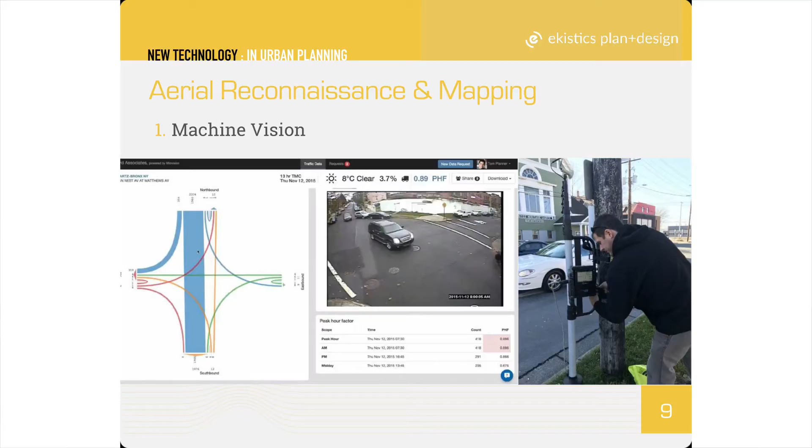The other piece of the machine learning is this Miovision setup—this is Roger in our office. We set these up on street corners, and it looks at the traffic at the street corner full-on, creates video, does it over time. Once you're done, you take that video and upload it to the Miovision website.

You go on to a Google Earth that's built right into it, and you tell it what intersection that is, how many lanes, whether left turn, right turn, straight through, and it generates all of the traffic data for that intersection. The cool part is it distinguishes between cars, trucks, bicycles, and people, doing counts for everything, so if you're looking at a downtown pedestrian count, you can use these machine learning algorithms and tools.

Rob, how do you deal with or manage security of that bit of equipment? There's straps built onto here, and it's chained there. If somebody wanted to come and hack that thing off with a hacksaw, they could do it, but they would be on camera as well.

When we were doing Argyle Street, we put that up to do some traffic counts. You get the data back - 2 a.m. brawls, fights, people come over and jiggle the thing. But nobody's stolen it yet. So, a little bit of entertainment there.

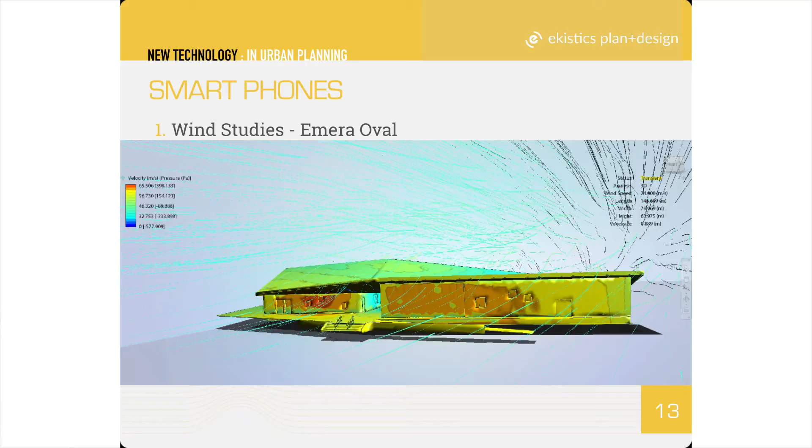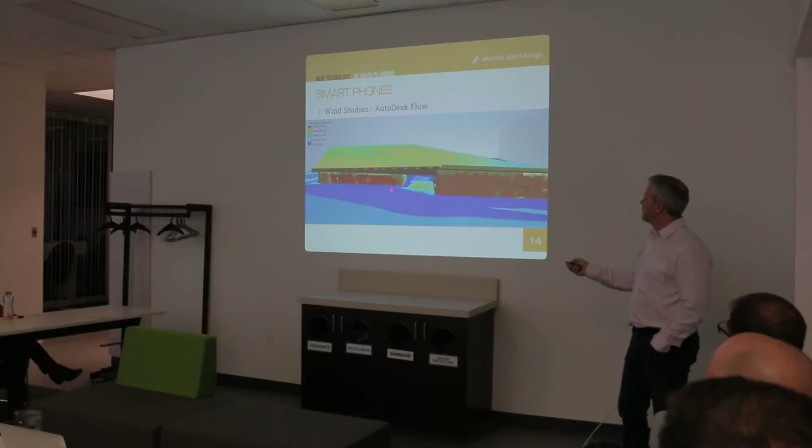This is Autodesk Flow, and this is the Commons building. There were some problems with wind around that building after it was built, so we pulled it into Flow and ran some simulations. You can see low pressure and high pressure areas of the building, and we can do slices through it. They were having a problem with wind blowing through the space between the buildings. In Flow, red indicates the higher wind speeds, blue is the lower wind speeds. You can see how when the wind comes from a certain direction, it really focuses into an area there.

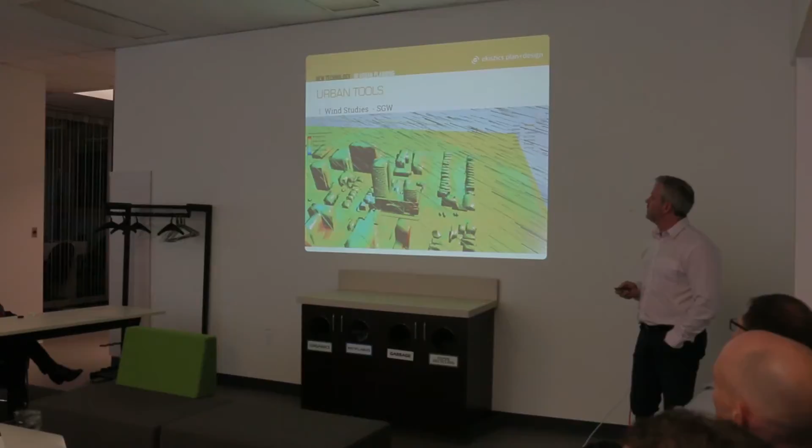Now, this isn't a replacement yet for full-on flume studies, but it does help create a little more accuracy with regard to desktop studies. When you take this, you calibrate it with your anemometer to get the actual wind speeds. This gives you a great relative tool, but not an absolute value tool. With an anemometer, you get much closer to actual wind speeds, and you can do that on a larger scale as well.

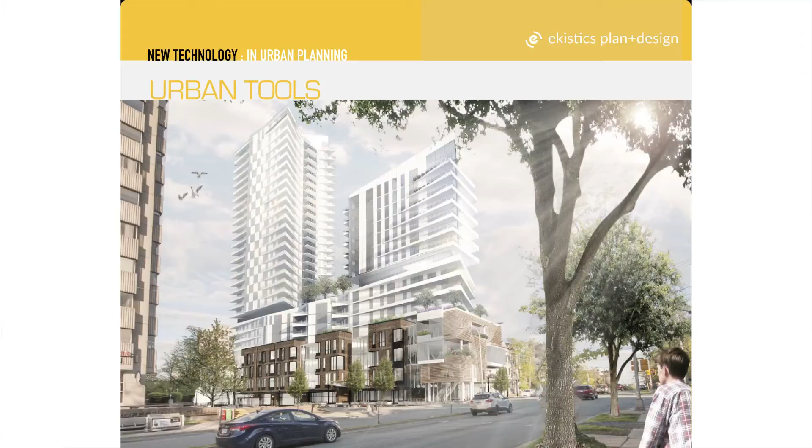It does have some problems - you have to upload this online, and then it generates the simulations. You have to have a really fast computer to run these simulations. This is for Spring Garden West, and we're looking at the impacts between the two buildings and around, actually playing with different forms of the building to see if it would reduce wind in and around the blocks around it.

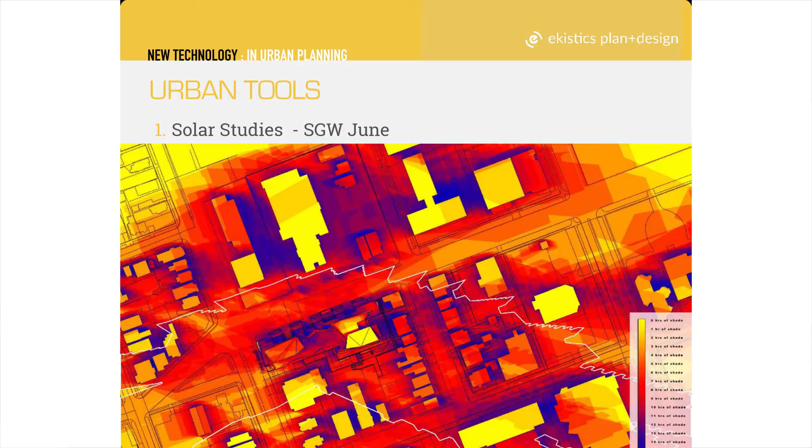Once you've got this information into, say, SketchUp, you can also run solar studies quite easily. You position your building in real space in SketchUp, then run the simulation for winter, summer, solstice, and equinox seasons. You can see the sun come up in the east in the morning, and you get these long shadows, with white lines representing where the building shadow will hit at various hours of the day.

If you pull all these images together in Photoshop, you overlay them one over the other. In the middle of summer, you've got about 14 hours of sunlight, so you set the transparency of each layer at 100 divided by 14, so that when you add them all up, you get black in areas of complete darkness. Then you apply a filter in Photoshop and get these blue areas, which are in shade 14 hours of the day, whereas the yellow areas get full-on sunlight. It's really quite an easy process.

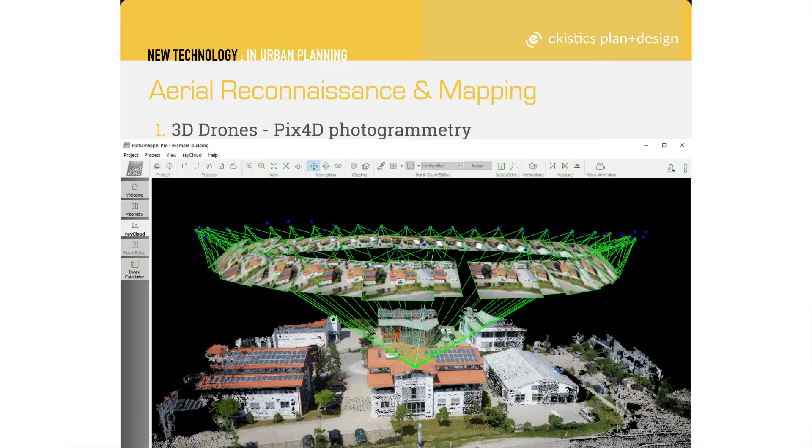The other application here is Pix4D photogrammetry. What it's doing is taking a drone, sending it on a pre-programmed flight of either an object or a landscape, and it creates a full base map from that, almost in real time. The drone flies out on a mission, you upload it, and it creates a base map. But it also uses photogrammetry, taking pictures from different angles to create a full 3D model.

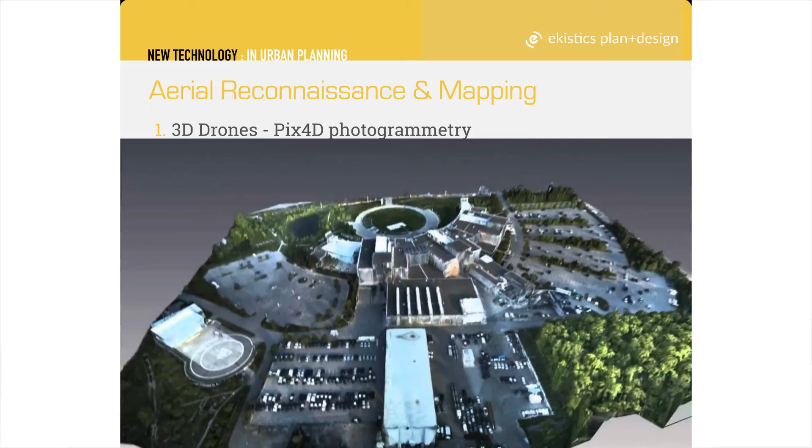It's not as accurate as the new ground-based LiDAR stuff, but it's relatively cheap - about $80 a month for the subscription - and you're able to generate 3D models with this software. It can be used for interesting applications: you can measure distances, the height of trees, topography, and generate TIN models and contour maps from this technology.

It gives you something you can use as a designer. You're able to pull this into, say, Civil 3D and generate topographic maps, do cut and fill analysis, river and floodplain mapping, all that sort of stuff, all with just a simple $1,700 drone.

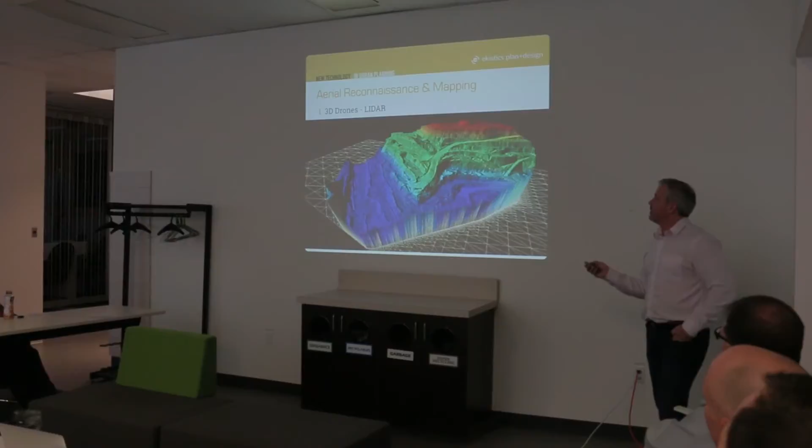The next evolution is drone-based LiDAR. HRM's got great LiDAR for most of the municipality - it was flown at great expense a number of years ago - but the technology to put LiDAR into drones is out now, just a bit expensive. They're anywhere from $20,000 to $30,000 for these new LiDAR-based drones. But in the next 2 to 3 years, you'll be able to pick up a drone for a couple of grand that can actually scan the land, giving us great information and great design tools.

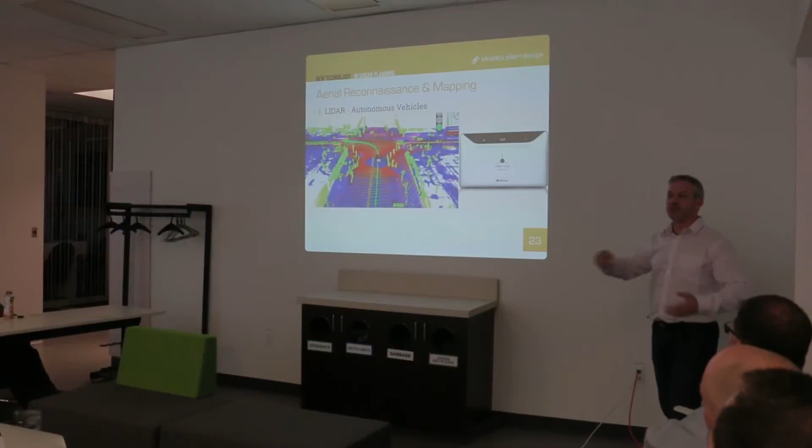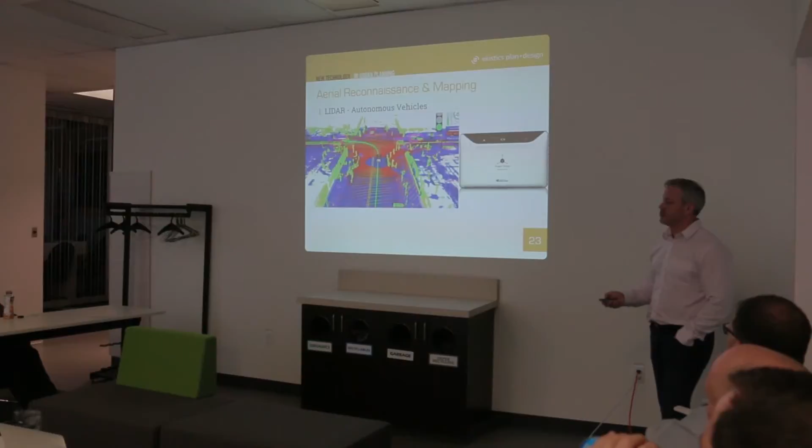LiDAR is being used for all kinds of things - it's really the brain behind most of the autonomous vehicle movement. But Google and Apple are both working on applications that will fit in your next cell phone. Google's working on Project Tango, and Lenovo has just come out with the very first smartphone with LiDAR built into it. I could literally scan this room, scan all you people, take that into software, measure distances, do volume calculations very easily. There are rumors that the next iPhone 8 coming out in September will have this technology built in as well. It starts to get really interesting for planning applications.

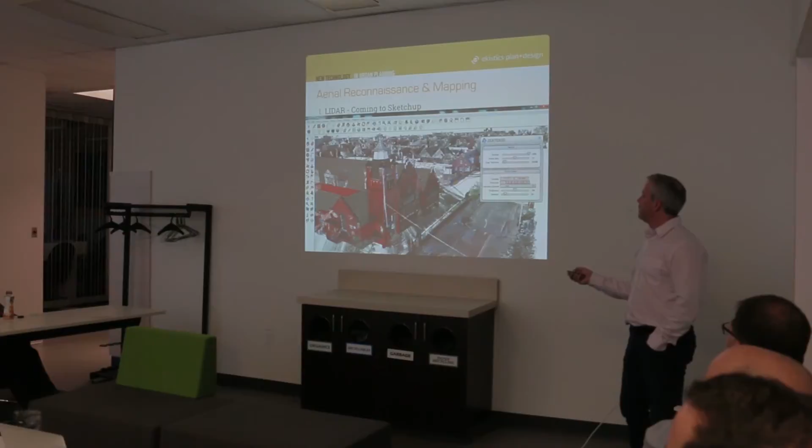Once you've got LiDAR, SketchUp is working on being able to import LiDAR cloud meshes directly into SketchUp, so that you're able to create - it takes about 1 million points out - and just creates simple surfaces from the data set.

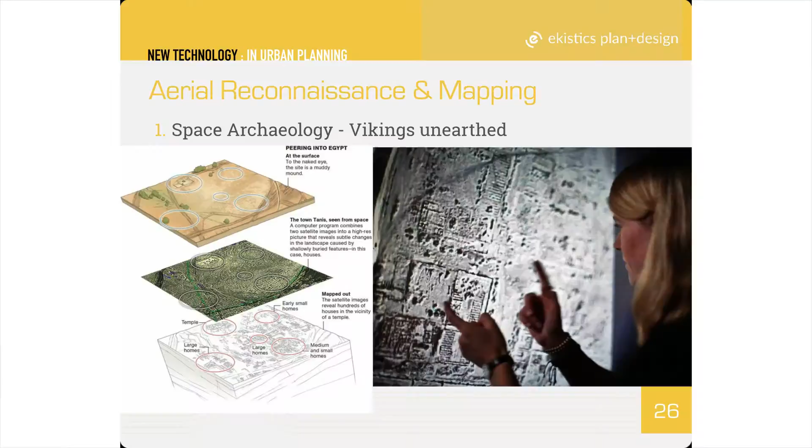One of the other really interesting applications is the new satellite technology. If any of you have seen the recent NOVA program - I think it's called Vikings Unearthed - there's a whole new field called space archaeology, where they're using satellite systems to do archaeology on the ground. The technology can see through about 1 meter of ground, so they can pick up surfaces from space. They've been able to find ancient Mayan sites and other things in the Middle East they didn't know were there. You can see right through the ground and pick up features you don't see with traditional methods.

So this technology is being used to look for new Viking sites all along the east coast here. The NOVA program goes into some detail about the L'Anse aux Meadows site that was found in the late 60s. One of the interesting things they found at the site was a butternut, and those don't exist in Europe. The only place they exist is along the coast of New Brunswick, in Ontario, and some of the southern parts of Nova Scotia.

So when they found that, they surmised that the Vikings must have come down the coast a little bit further, and all of the writings suggest that they came into Vinland. They haven't been able to find it until recently.

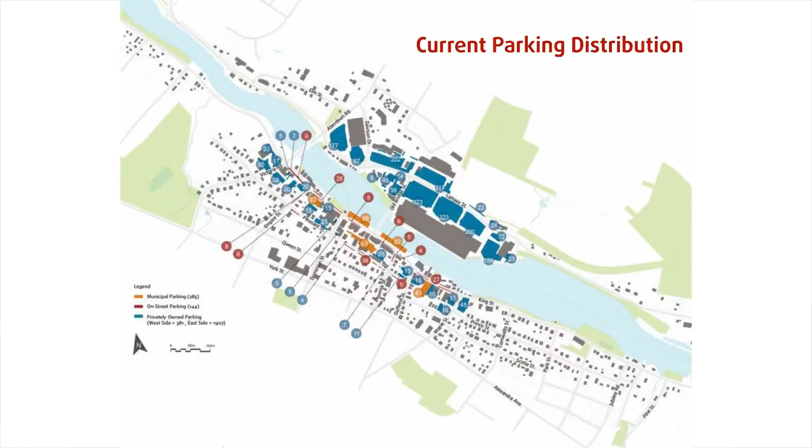This is Bridgewater. We worked on a plan for Bridgewater back in 2012, a community master plan. One of the things we noticed when we started - I'm sure most of you recognize this when working on downtown plans - the retailers quite often say, if we only had more parking, that would solve all our problems. And of course in smaller communities like Bridgewater, that exists in spades - Summerside, Bridgewater - they were looking for more parking downtown as a solution to the urban design problem.

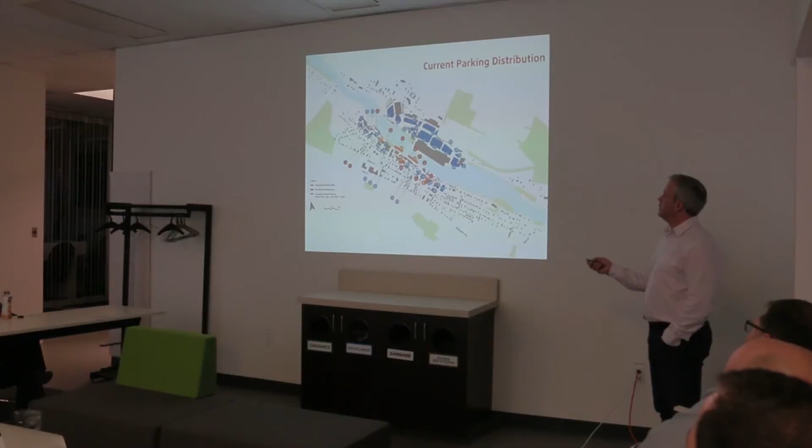But what we were able to do, using some of the drones, was do the parking counts, do the turnover analysis, and suggest some areas where we could fit in a little bit more parking.

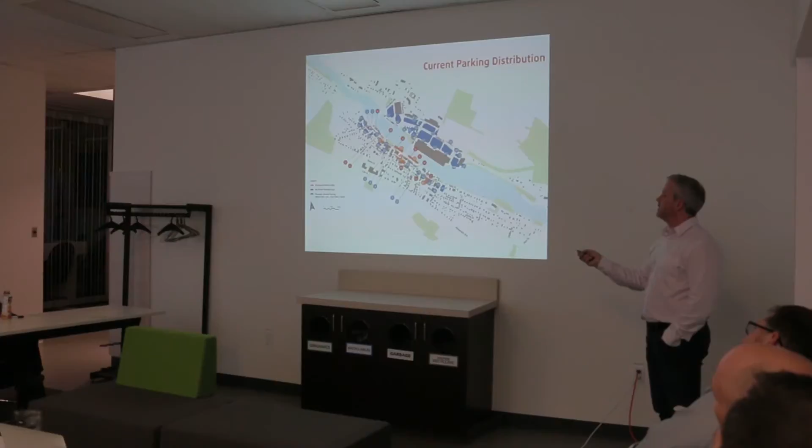But one of the big ideas out of the plan was that there's a movement towards getting a lot more people living downtown - so it's not just Halifax, the smaller areas are looking at that as a vehicle to reinvigorate their downtowns. So one of the things we needed, if we're going to get more people living downtown, was better parks and better connections to the open space.

When you're on the main street, you don't even see the river here because of these two parking garages that they built out over the river. So here's one of these parking garages. Here's King Street, and the river is just hanging down here.

And so one of the ideas out of the plan was, what if we took and got rid of this parking structure and reconnected the main street back to the riverfront, creating a new park.

And so we started to - let me just see if that... I had a little... no, it's not going to work.

We used an animation to be able to design this and fly through this proposed new environment.

This was last week - they opened up the street after 5 months of construction. They've got this - they wanted to be able to drive down, pull boats in and out of the water, new docking facilities, kind of a throwback to the old parking garage that was there, a new lookoff, interpretive panels, glass structures, little seating nodes, landscaped area. So an area where events can happen on the river.

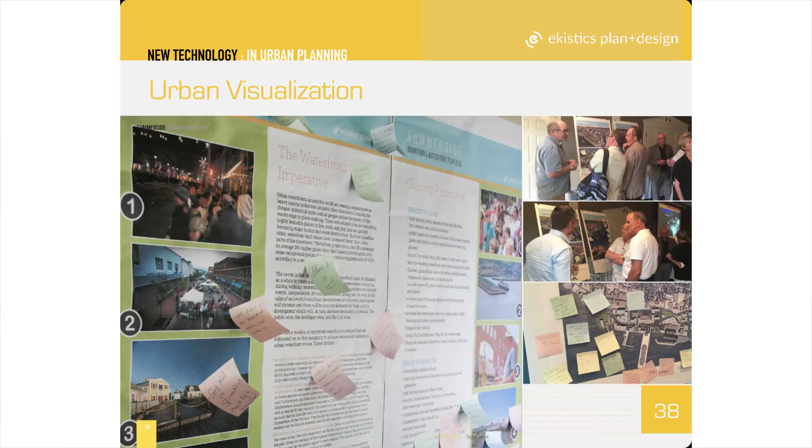But even on smaller communities, we use the same kind of technology. We've run in Summerside almost 3 years worth of public engagement sessions, workshops, community sessions, and open houses to try and get a sense of what the community would like to see.

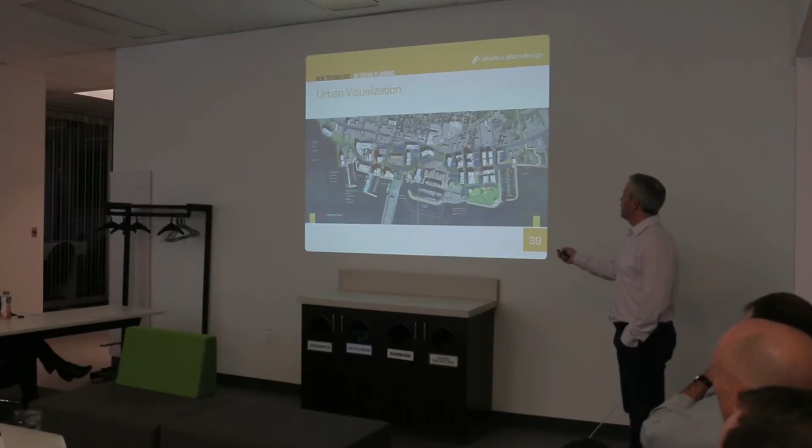It led to an overall plan for the downtown, and if you know Summerside, the old Towers Mall is right here, and so it's in the plan. Part of the big idea is over time to convert that into a campus. It was bought by Holland College, and so the idea is reintroducing a street grid and a new urban structure, creating a new marina, using the infill from that marina to create a new urban park that would service residents as well as the university.

And then if you've ever driven downtown Summerside, it's a lot of open parking lots. So how do we start to look at infilling those sites with new development?

And as well, then you're into the same tools here in Summerside, where we're able to use GIS information to just propagate flat buildings. We went into the downtown, did a little bit more detailed modeling to get some of the existing buildings, and then used buildings to show how this new urban campus might look.

Student housing - it's obviously a very ambitious plan, this is probably a 50-year future here, but for the downtown it's looking at kind of 7 to 9 story buildings, mid-rise buildings, and preserving open space, all these views out to the water. So a lot of the same things that are part of the plan here have been integrated at a smaller scale into Summerside's plan.

Lumion was used for this. Once it's done, you can pop it into VR and look through these landscapes, zoom in and get a detailed sense of what streetscapes look like, what the spacing of buildings might look like, how different scaled buildings feel on the street, and that helps inform your form-based code for the area.

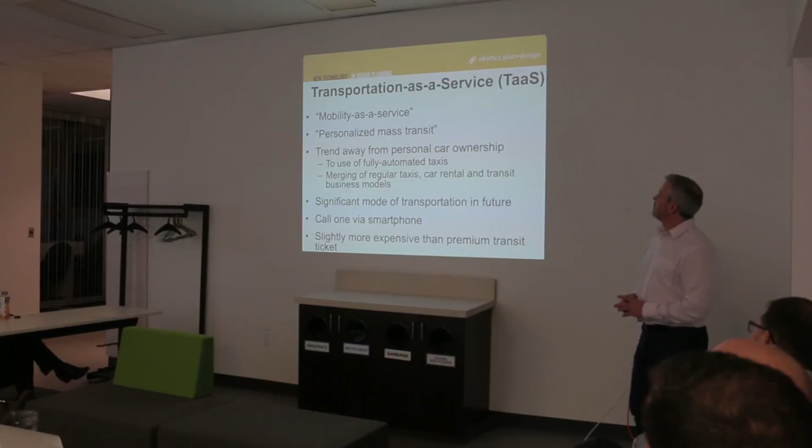So this idea of transportation as a service, the idea that through your smartphone you have mobility as a service, and you really have personalized mass transit, so it changes the transit dynamic quite a bit.

And so in Toronto during this conference, the Transit Authority was there, and they've got plans in the hopper for billion-dollar transit-oriented developments that they're now starting to think, wow, what are the implications of this if we start to invest now? By the time it's built, this technology is going to overtake what we've invested in.

Of course, it changes where people live and work, so it changes the design of homes and how you set up. You don't need garages, but you need pickup areas. So the overall thrust is that hopefully it creates less parking space, less pollution. So these are all kind of the panacea. It will be interesting to see what really plays out at the end of the day.

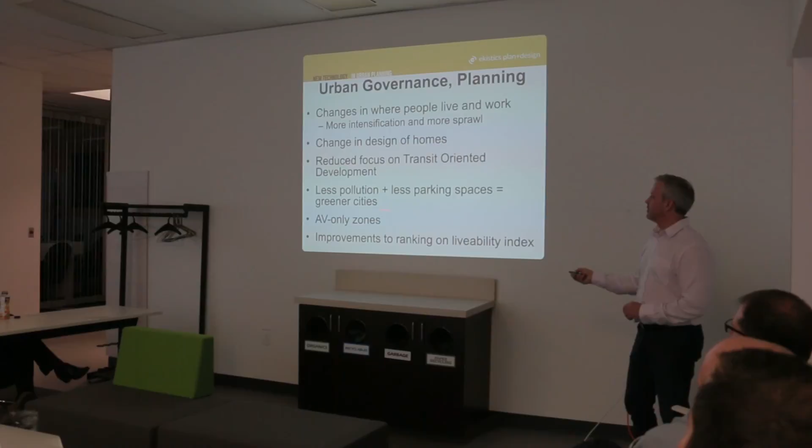But we're certainly going to see AV-only zones, and if you've been listening to the radio this week, Ontario's the only place in Canada that is actually doing the testing. So BlackBerry, some of the universities, and industry are all coming together. So they've got their first 3 prototypes that are now driving on the roads in Ontario.

And it would be neat to think that Nova Scotia could be a player in this and start to - we're small enough, we don't have the same traffic levels. It would be neat to think that we could dip our toes into this sooner rather than later. So some of what Helsinki's doing is really interesting.

Providing an array of options for cheap, flexible, well-coordinated transit becomes competitive with private car ownership.

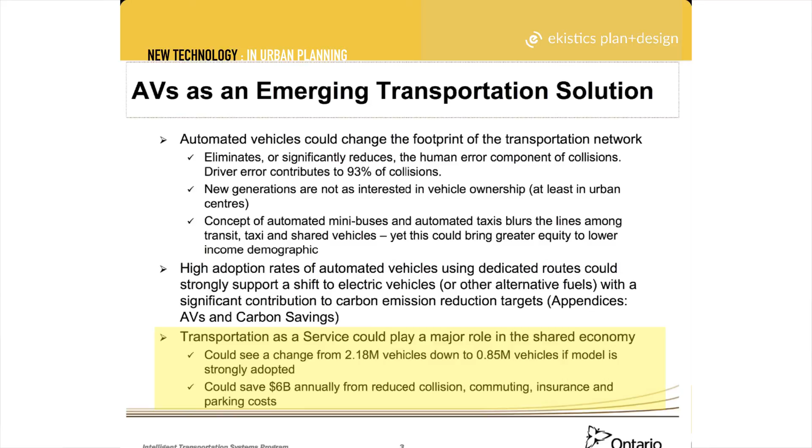So lots of interesting things coming up on it, and I think you'll find the presentations really interesting to read. But the transportation as a service, the way Uber works, where you can call up cars, is going to be playing a much major role in the shared economy.

And we could see, this is from the Department of Transportation here in Ontario, a change from 2.18 million private vehicles down to 0.85 million vehicles if it's strongly adopted.

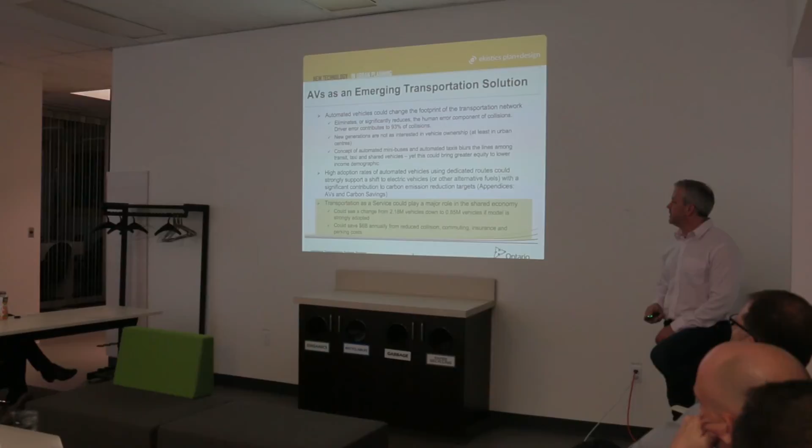And so there was a lot of questions here, the autonomous vehicle people that believe in this stuff, starting to ask questions that only planners can start to answer. How do we repurpose parking spaces? How do we take advantage of these, and how do we look at these for new transit solutions?

And so they're launching in Germany and other locations much smaller transit where you can only fit 6 people on these vehicles, and it just goes around and regularly picks you up. So we'll see all kinds of different transit solutions.